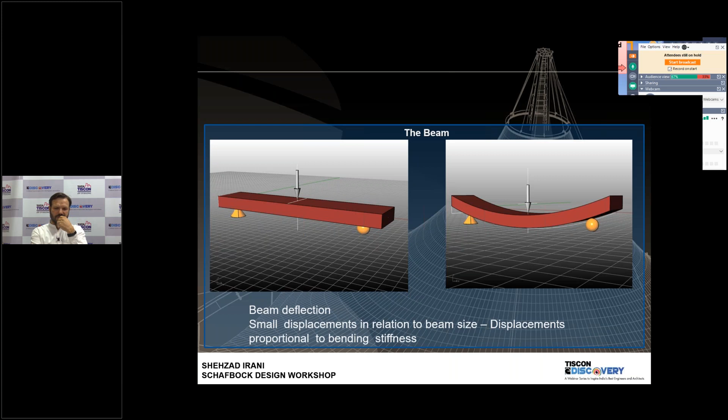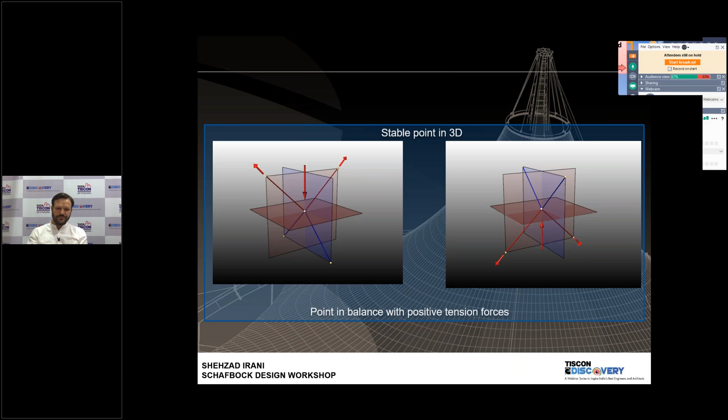But there is a whole new different type of structural system which responds to stresses by large displacement, and these are what we call soft shells, and they change their geometry to fulfill the equilibrium equation. To stabilize such geometry, we would have two opposing curvatures in perpendicular planes so that they balance out the positive tension forces. So now, apart from flexural systems, we have surface structures which are developable systems, which are flat, having a Gaussian curvature of 0.

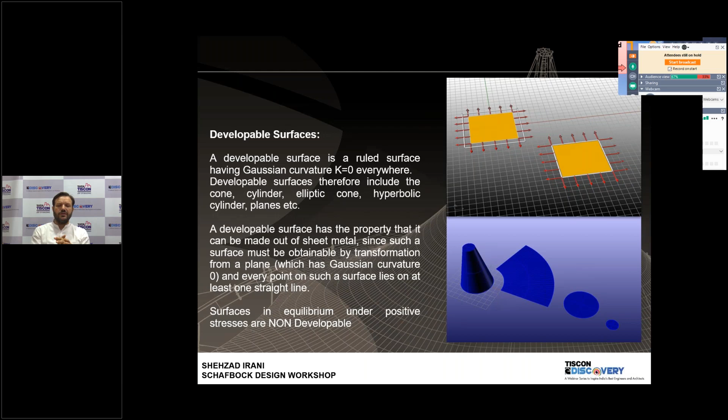When we say Gaussian curvature 0, they are developable surfaces. You could make them out of sheet metal, plain paper, or fabric. But there is also a whole different set of geometries which are non-developable surfaces, where the curvature is less than 0. These surfaces are what we call anti-clastic surfaces.

Anti means opposite, clastic means curvature, so they have opposing curvatures. If you see here, the blue line goes from high point to high point, and the red line goes from low point to low point, and both curvatures are opposite in direction. So basically these cannot be developed so easily, cannot be folded out easily without sufficient algorithms, because they are geodesics.

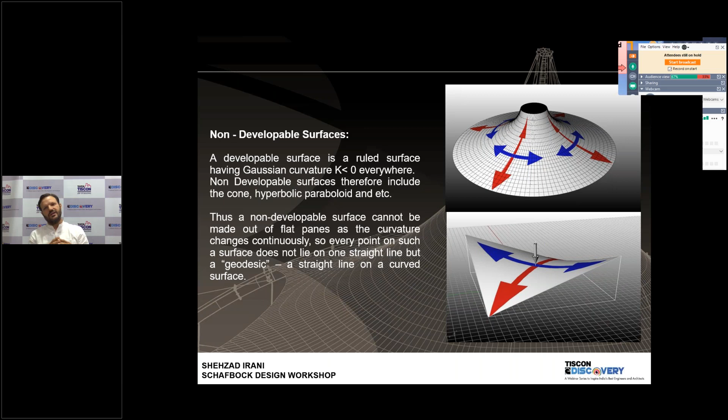Then the question really is, if you have curvature 0 and if you have less than 0, what surface do you have if the curvature is more than that? So we have what is classically called cushions, shells, paraboloids, where both curvatures go along the same direction along the surface, and these are inflated, cushion-kind of surfaces.

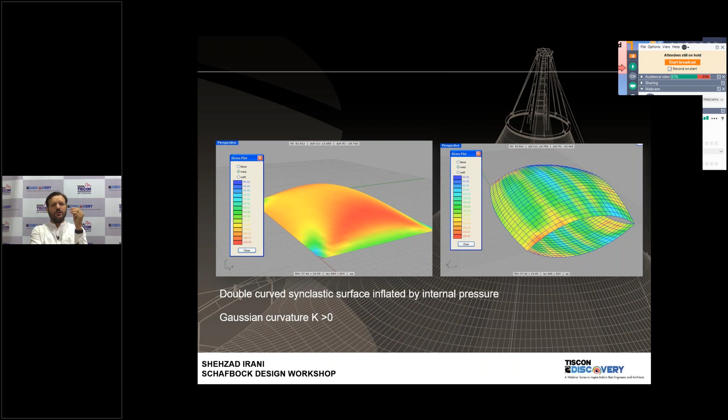So when we talk about design and analysis of tensile structures, when I talk about tensile structures, I purely mean high tension structures. I do not mean tents or canopies, because those are very low tension, low pre-stress kind of structures. They need to have a certain amount of negative Gaussian curvature.

When I'm talking about single layer curvatures, I'm not talking about cushions. They need to have a negative Gaussian curvature, so that the stress is along, and you have a uniformly stressed structure.

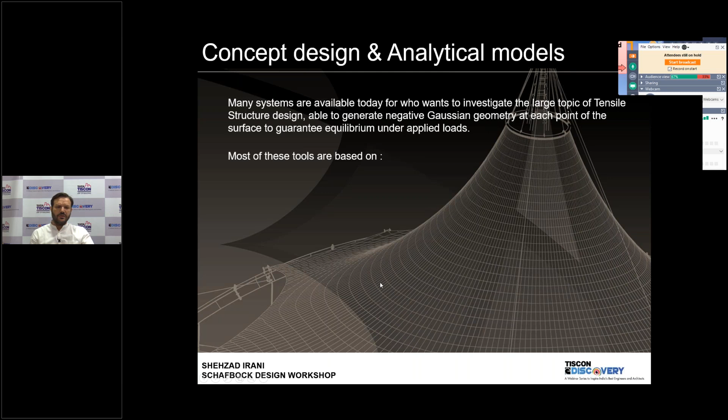Most of these tools are based on 3 or 4 different types of algorithms: force density method, dynamic relaxation, non-linear FEM methods, and natural force density method. These are

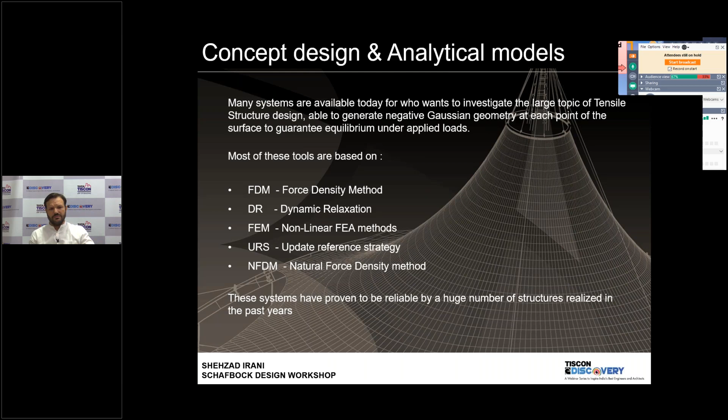all methods, algorithms, mathematical models to achieve our tensile structural systems. Let me just go through the systems to tell you about what those systems are about.

Force density method has been around since the 1970s. It was the math written to design and analyze the cable nets of the Munich Olympic Stadium. It's very fast and very easy to understand, quite robust, used worldwide, and able to solve a plethora of different types of geometry, mainly non-uniform distribution of stress.

But the disadvantage with these systems is that it's difficult to mix different mesh orientations, because you would require geometric alignment of the mesh, quadratic alignments of the mesh. Shear stiffness is neglected, so in most cases it's not so much of an issue.

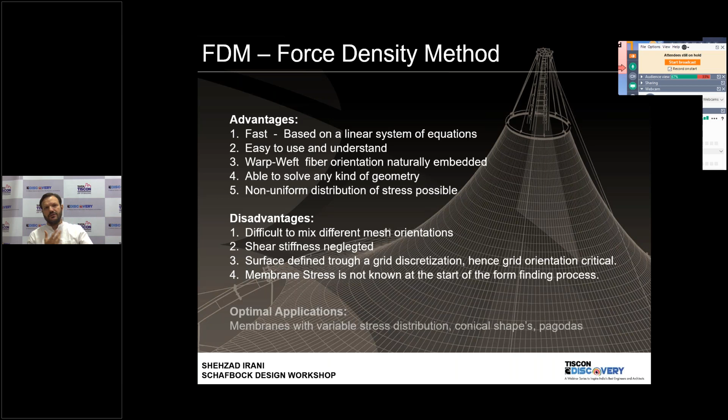But when you find extremely asymmetrical kinds of structures, like cones, there's a high amount of stress concentration on the end points and on the head ring, and shearing happening within the membrane. This is neglected and cannot be plotted using the force density method, so it's difficult to use these kinds of systems for such applications.

It's very apt for using in systems where there is variable stress distribution, like conical shapes, like pagodas, and so on and so forth.

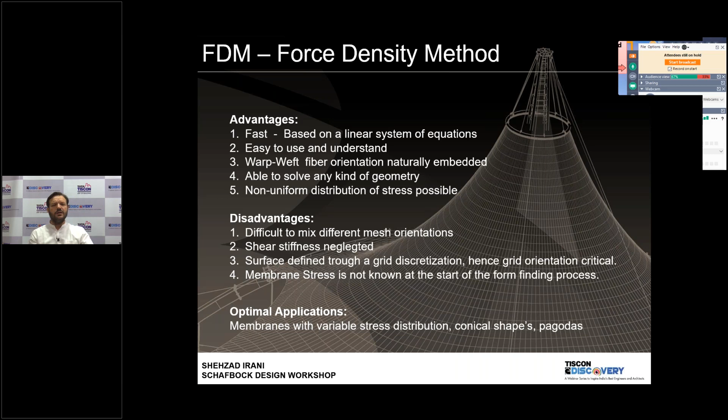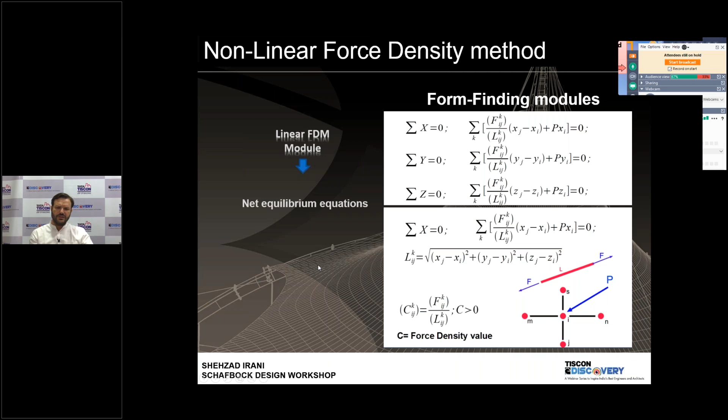When we talk about nonlinear force density methods, this is the algorithm for finding out force in a linear way - I won't go into the math right now. Basically it is more linear oriented. If you see this curvature here, but over this axis there's very little curvature, hence force density method would be the right algorithm to use for this kind of form.

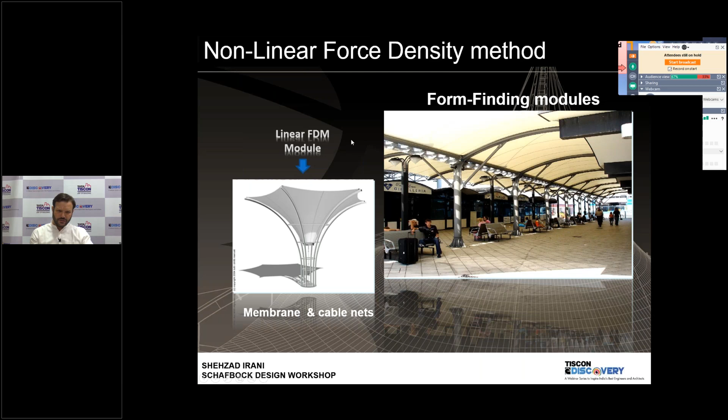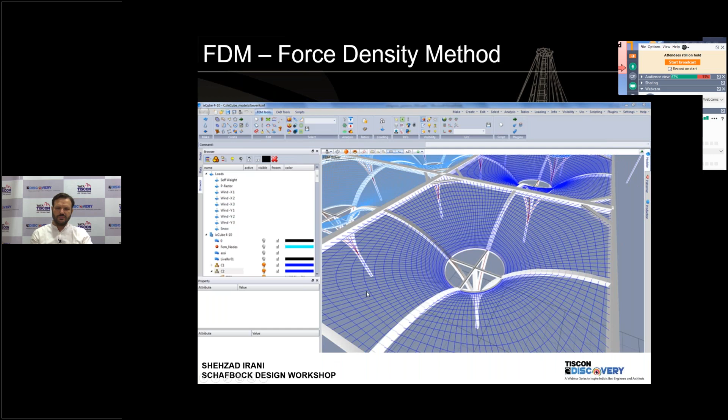So you have the grid over here with stresses on them as elements, and each of them has stresses. These are the kind of structures you would design using force density method, because you would see the warp and the weft having different elements of stresses.

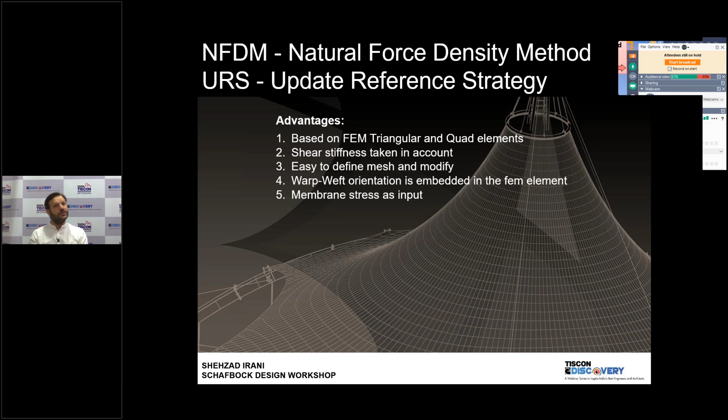When we talk about nonlinear natural force density methods, URS and NFDM are good approaches, because you work with triangular meshes, and you work directly on the meshes. So you work with surfaces and not only a grid or quadratic setup, and you are able to do a lot of continuum surfaces using NFDM.

But in this method, the warp and weft orientation has to be assigned, because without assigning it you will not be able to track the shear stiffness. And that brings me to the weaknesses of these systems: they are very difficult to use to find and define non-uniform stress input.

If you're talking about continuous cones and rectangular cones rather than squarish cones, it's very difficult to find the form using NFDM. Similarly, because we need to get the shear stiffness, we also need the Poisson values, and these are not usually available or calculated by the fabricator, and they vary a lot depending on the pre-stress and for each load case. So it becomes way more complicated than FDM to analyze.

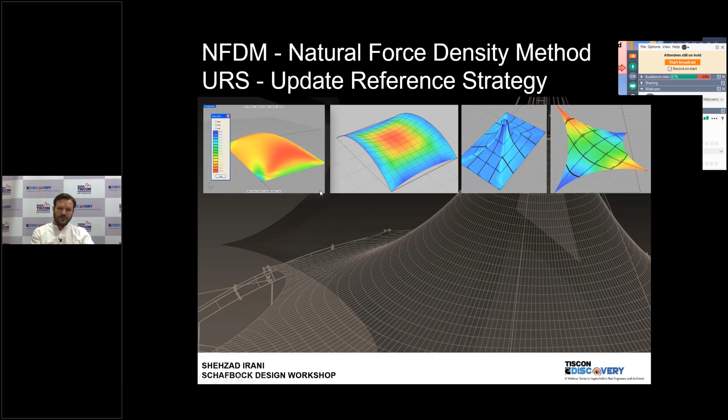These methods are usually suited for cushions, minimal surfaces, and membranes with uniform distribution of stress. NFDM was developed by Ruy Pauletti, and URS was developed by Kai-Uwe Bletzinger. As I said, these are the kinds of forms that should result.

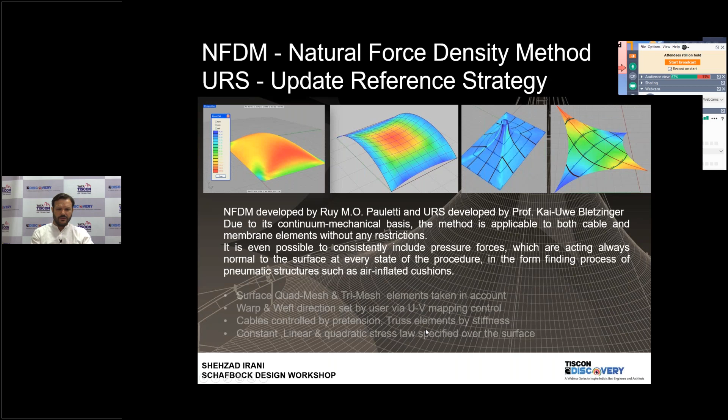When we talk about another method, called the direct stiffness method, which is based on FEM triangular and quad elements, shear stiffness is again taken into account. It's a much more technical form-finding method, because you are inputting the membrane pre-stress as an input, so it's actually like saying we are pulling a certain membrane with certain pre-stress, and seeing what form results.

So we are directly inputting the stress and directly getting the form according to that. The advantage is that it's very good for structures like tents, tarps, and inflated structures. But when we're dealing with very complex forms, it's extremely difficult to converge these kinds of matrices. And again, the Poisson's ratio needs to be as accurate as possible, which is usually not available.

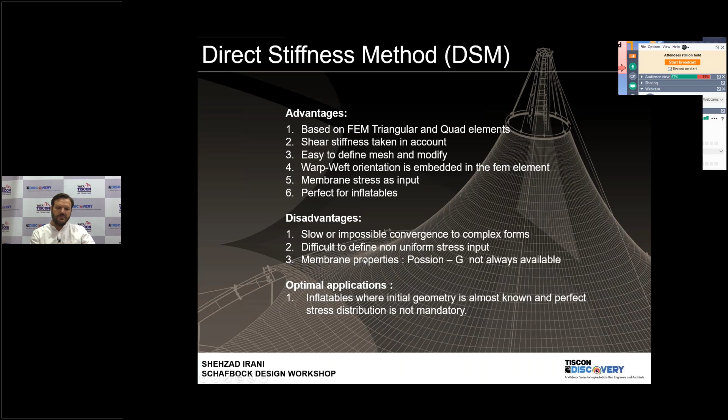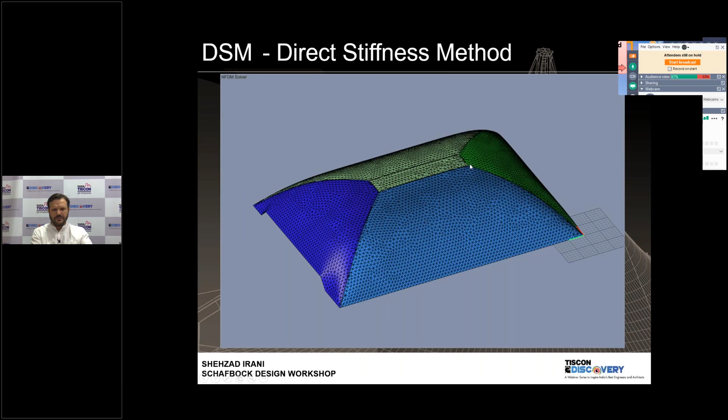Now a wide application is inflatables, where we already know roughly the form that we want, and we just want to get the overall pre-stress and stress distribution over the surface. So to give you an example of a similar kind of thing, this is roughly the tent we are looking at. It's an inflatable with cable at four corners, and you can see that it's not a uniformly distributed stress over the membrane.

But we are okay with this, because as builders we tend to reinforce this with a double layer or triple layer, and we'll be able to get out these stresses. But overall we have the actual pre-stress that we are looking for in such a structure.

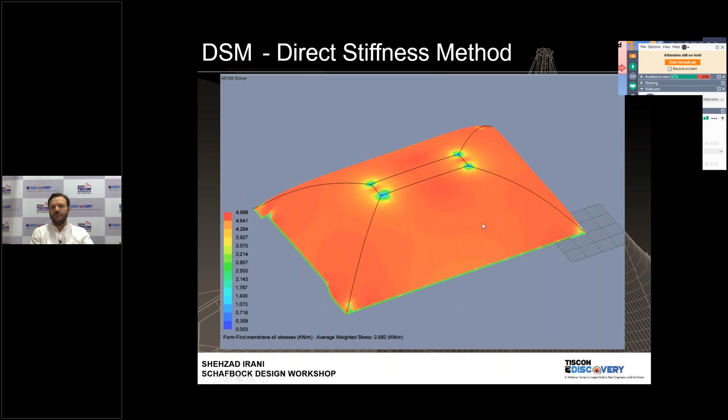So just to give you an example for this one, I'll just get the answers. We would tend to do FDM for this kind of structure, because the grid is quite quadratic, and we've got a variation of stress completely over the membrane. We would do an NFDM or a URS to get as close as a soap bubble film for these kinds of structures.

This would be an NFDM because we want as much of a uniformly stressed surface as possible. And this, obviously, when we are taking a stiff piece of, let's say, a 2 mm sheet of aluminium, and assigning certain forces, and we want to see how that piece is going to deform, we are going to use the direct stiffness method.

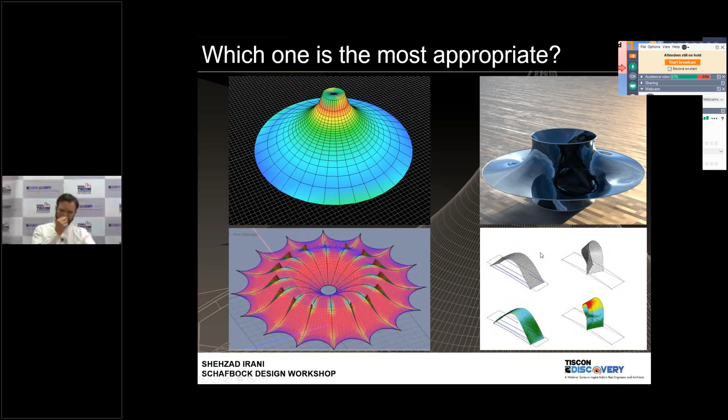So what usually happens is that if you have a linear FDM or a non-linear FDM module, or a URS module, you will first find the form and get the pre-stressed membrane or cable system. Then you would put in your supporting structures, which will plug into your non-linear FEM module, the finite element method module, and get your final model ready for other processes and so on.

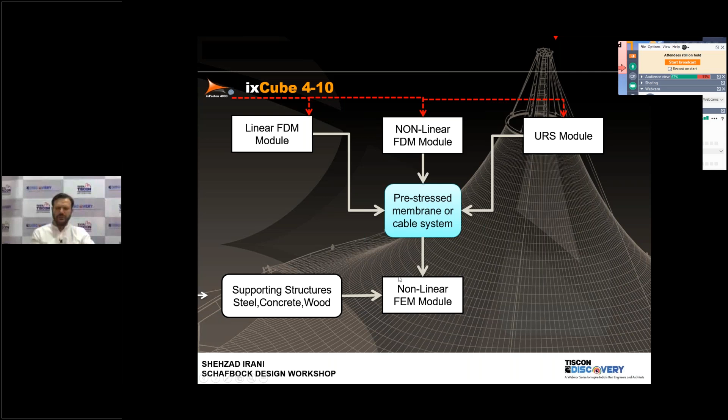So this is roughly the path that you would follow. The reason I would separate the form finding module out is that there's a tendency, if you're not very experienced or don't know your final target pre-stress or target form, to go into a loop between the form finding and the pre-stress a lot before you achieve your final form. And if you do it with the supporting structure, it will tend to be a very long process.

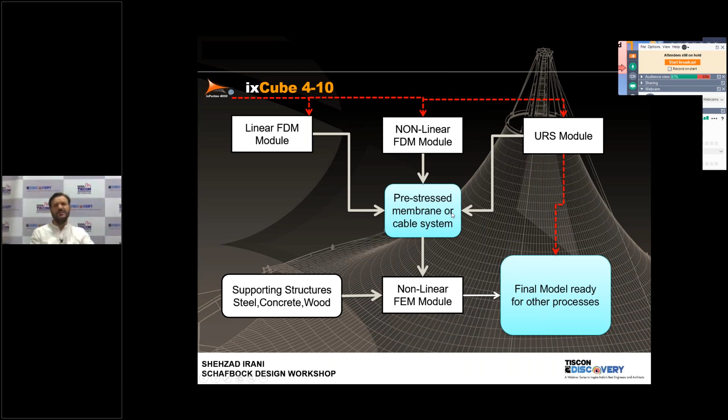So the real idea would be that you finish your loop here, then you come in and do your analysis module, and get the final model ready for other processes. But tensile structures, as we know, are not only for membranes.

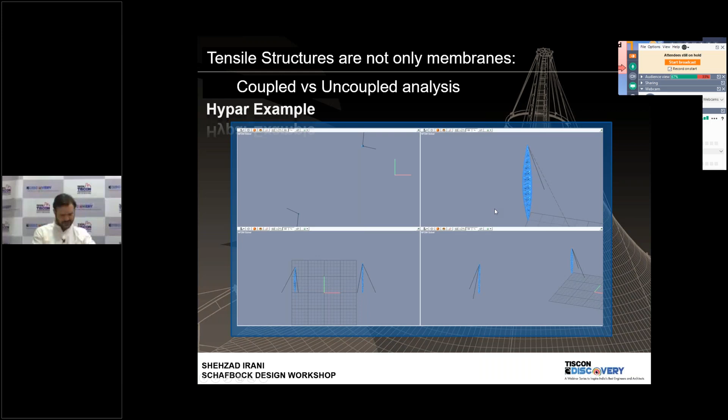So what happens is that usually people will work with coupled or uncoupled analysis. They will do the form finding, get the stresses in the warp and the weft, and then put the structure into another software and get the forces there to design the steel. Now I'm just giving you a very quick example of this.

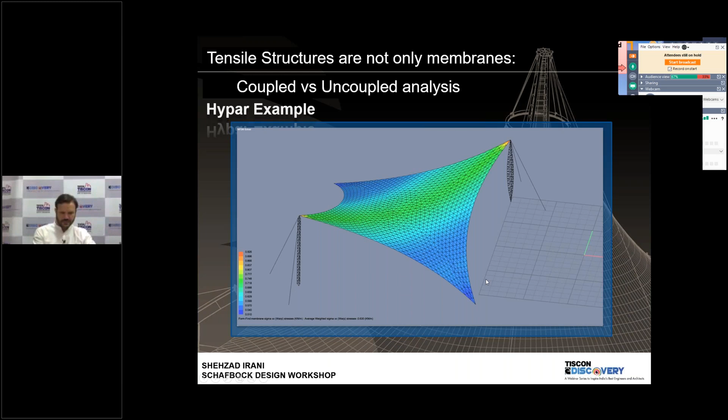That was the uncoupled part, but this is the coupled part, where the structure and the membrane are in the same software itself. So here you see the coupled analysis where there's a certain amount of deformation, around 140 mm. And again, if you see the node displacement, it's 145 mm or so. Now over here, the beam will tend to rotate and come in.

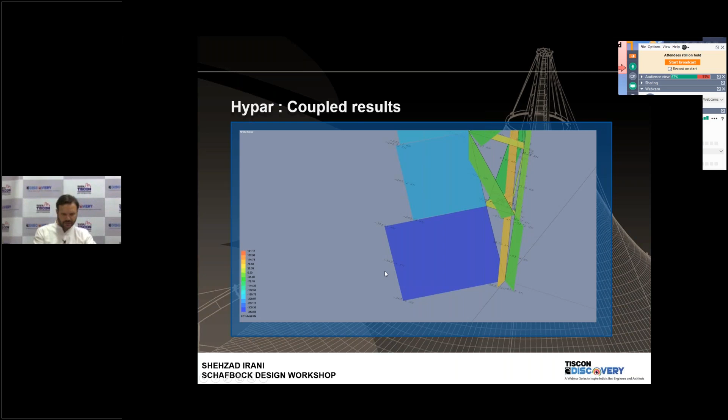And then you have, because it is coupled, you would have the stresses in these cables, which is around 191 kilonewton, and at the beam bottom, which is around 343 kilonewton.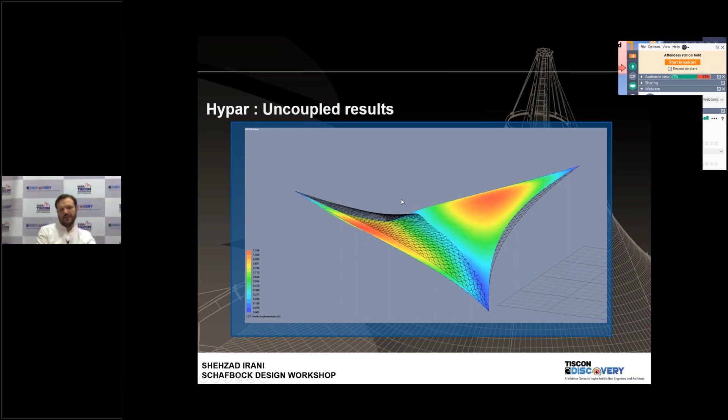Now let's do an uncoupled analysis. When we do the uncoupled analysis, obviously these nodes are fixed, so the deformation displacements are much lesser, because it's not rotating and coming in, and it's not losing pre-stress. But when we take these forces and apply them into this system, we will get our forces in our cables and in the steel elements. And here you see now the load is around 537.

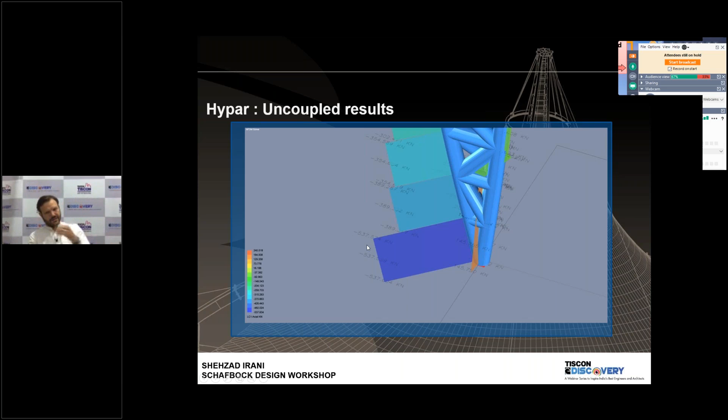So what does it mean? It means that when we do a coupled analysis, the deformation for an uncoupled case reduces by almost 23% in this case. But when we talk about the forces, they increase by 30%, and the actual force on the beam, the reaction beam axial force, increases by 56%. Similarly, the reaction at the foundations increases by almost 30%.

This means that when we design in an uncoupled way for a pure tensile system, we will tend to design our foundations at least 30% heavier. Similarly, the steel structure supporting our tensile structure would need to be much more, around 56 to 60% more than what is actually happening in the structure. So it is very important that we design it in a coupled fashion rather than in an uncoupled way.

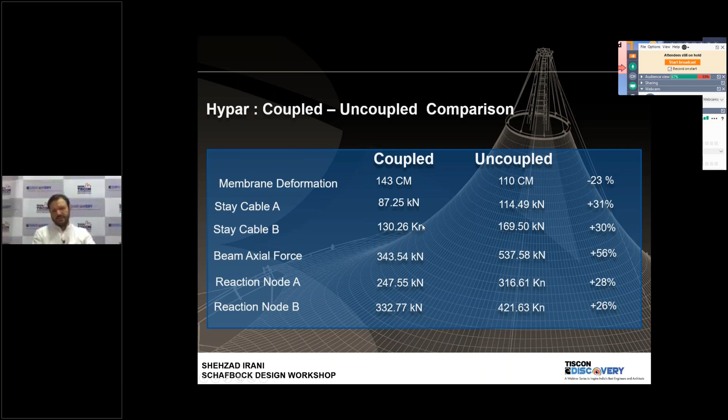So how do we go about doing this? Basically we have what is called conceptual design, where a sketch from an architect or a designer goes in. We have the form finding, the structural analysis, the structural design, the patterning, connection details, and installation. The design process usually starts with the architect making a sketch.

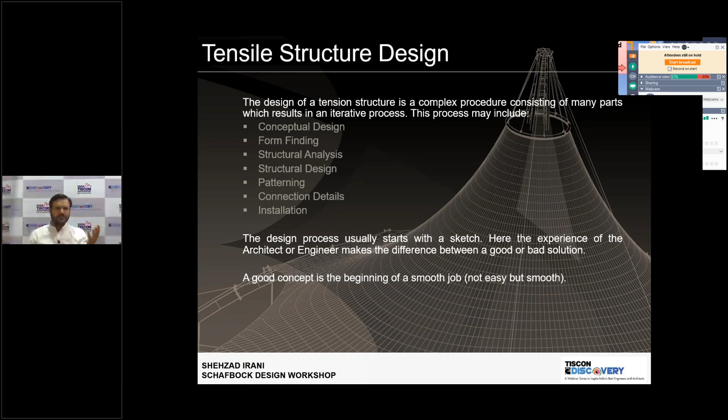The experience of the architect or the engineer usually makes the difference between a good and a bad solution. A good concept at the beginning results in a smooth job because you converge your design faster, you don't have much changes. But a bad one becomes a nightmare and is generally very expensive to build, or it might not even be buildable because they do not follow the stresses.

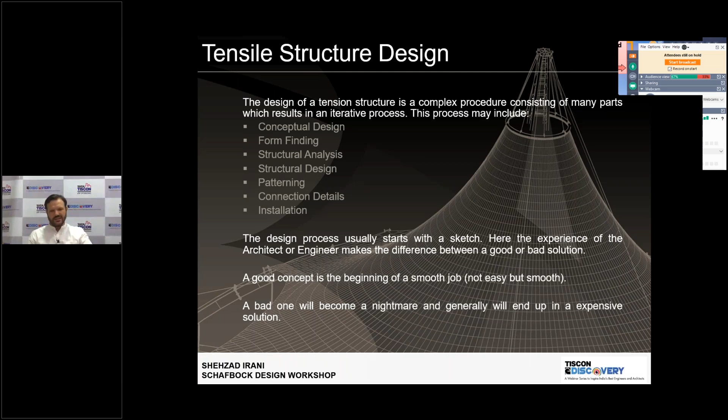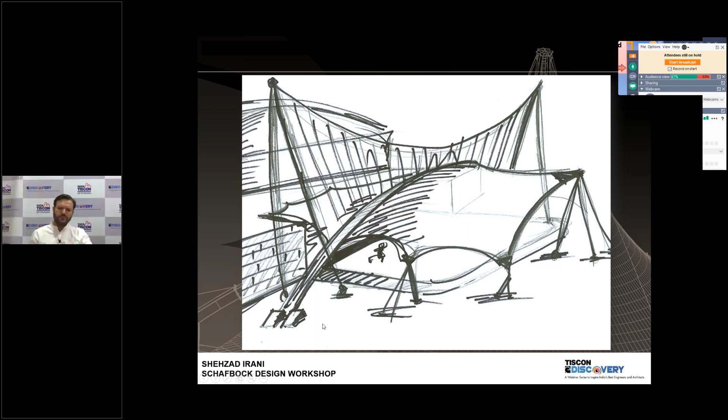You do primary 3D modeling for them, certain day views, certain night views, so that the client can get a real feel about what he's expecting out of the structure. And the deal is done. This is the price. You go ahead and you start constructing the thing.

Now, because it was built with such a lot of clarity, you can do this much amount of detailing, or you are clear about how the tensile system is going to work out, and it works out pretty well, because this is what the original sketch looked like.

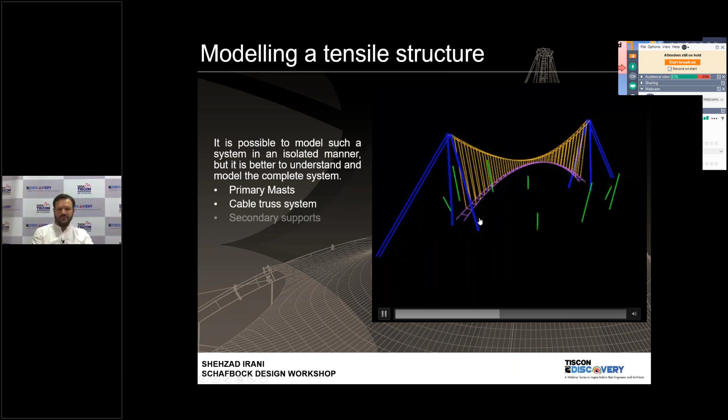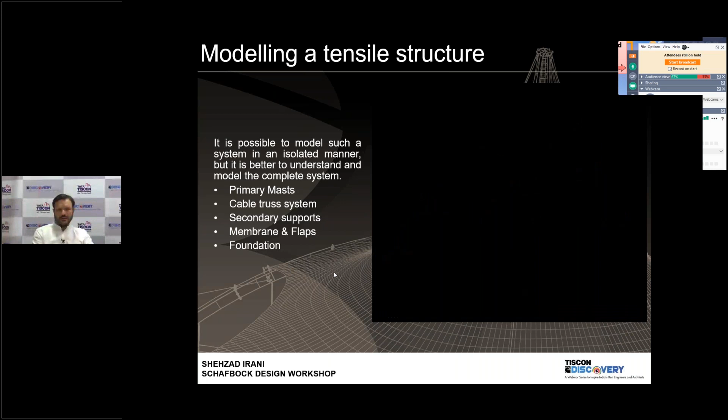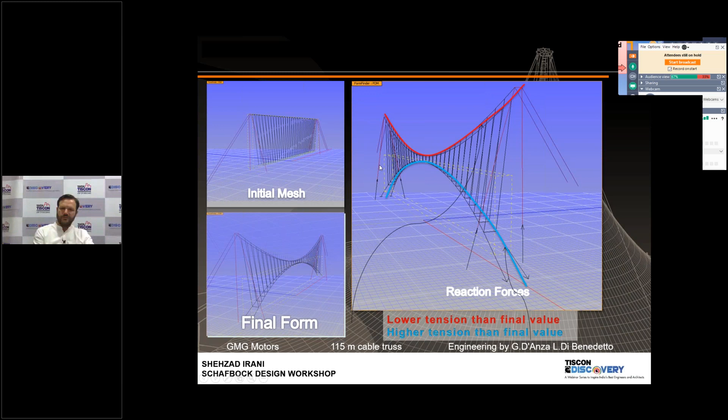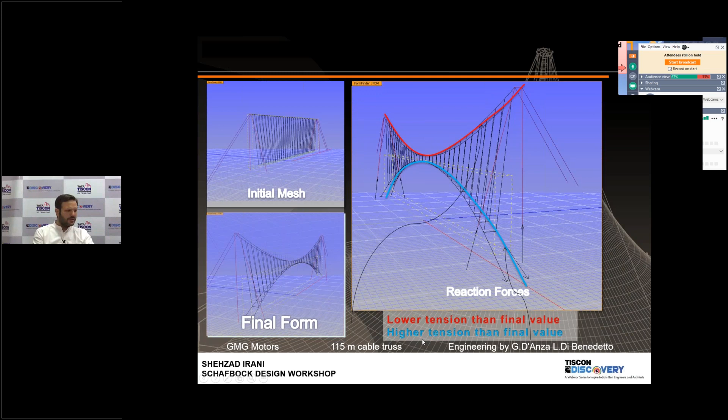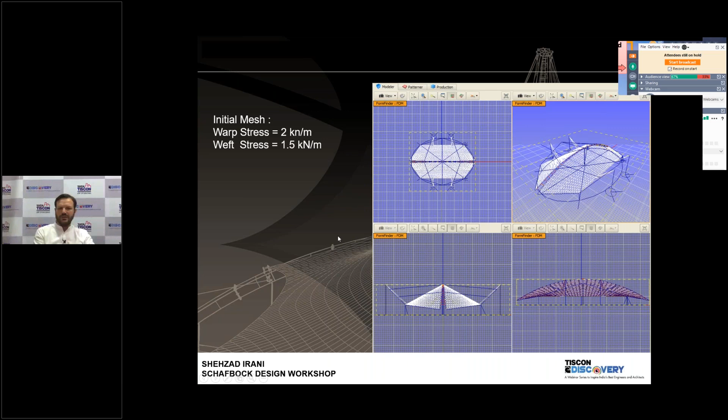Basically what happens is that the upper cable will have lower tension, and the lower cable will have more tension, and that's why it will pull out and make this kind of form. After that, we have done our initial form finding with our nodes fixed to get the form, and then we'll incorporate it into our final structural system to understand the direction of the principal stresses and the supporting stresses.

And then we merge the model. So the ideal way is, as I explained, that you first do your form finding separately, you converge on the shape, the height, the ponding, the wind forces, have a rough idea of what changes in the form are required, and then involve the non-linearity of your structural system.

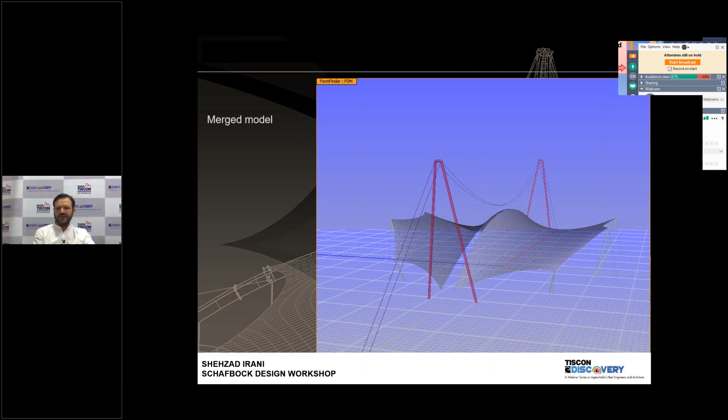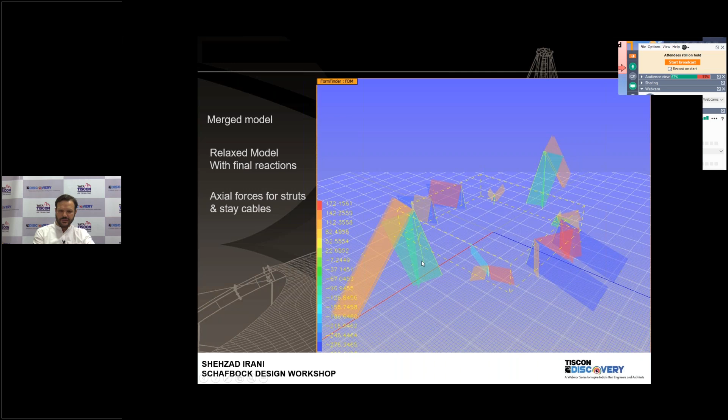So this is the final structural system relaxed with final reaction forces, for which you shall be designing the foundations. And everything, if you see, they are in axial forces. There are no internal bending moments that will be there, but the whole structure is in axial compression or tension. So now the model is ready for detailing patterns and analysis.

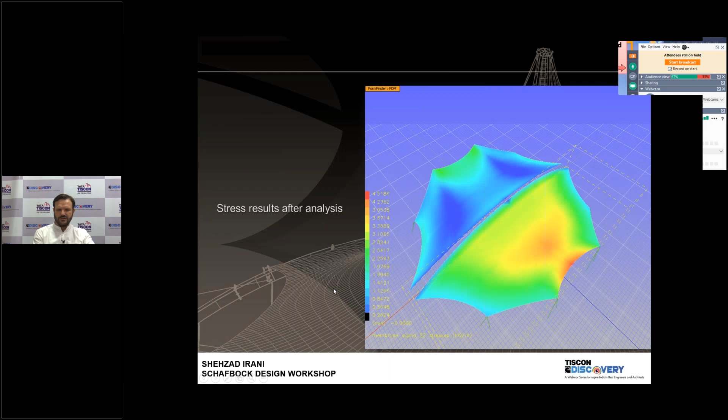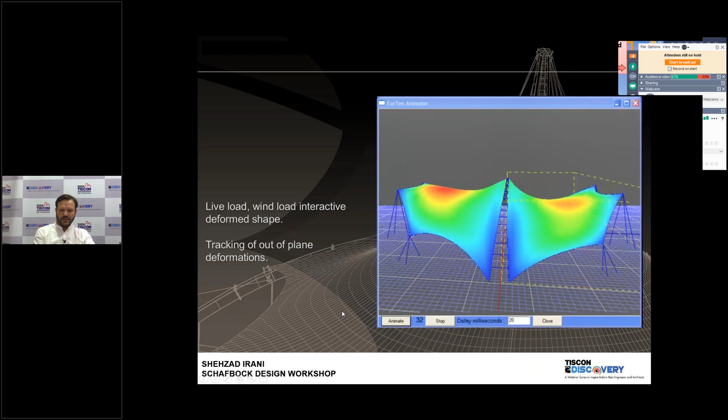So I'll take you through a couple of case studies about how we go about designing the structures so that you can understand them better.

This was a project that was done in Barquisimeto, and the clients were a very big builders, Sambil in Bogota and Venezuela. And basically the roof is shaped like a cuatro. Cuatro is a four-string musical instrument, and that was the main idea.

The total foundation area is 180,000 meters square, and it has over 2,500 parking spaces with 260 commercial premises, and so on and so forth. The roof itself is around 4,500 meters square.

Again, being South America, which shares similar kind of cost issues like our country, at the same time it required a very European kind of finish design. The type of membrane that they wanted to use was pretty low grade.

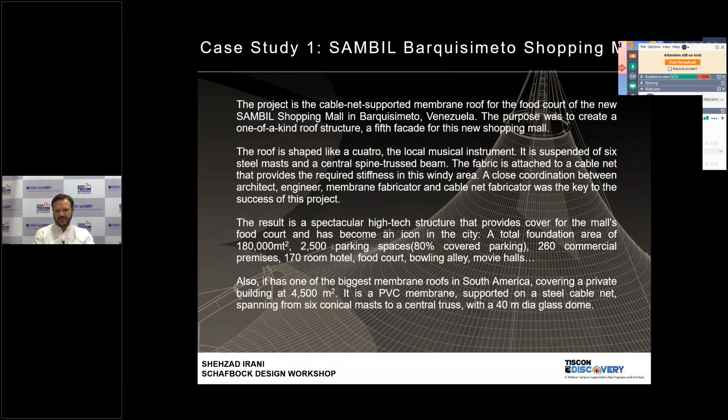So basically, this is the whole structure, and this is the roof, this is the glass dome, and this is the main span of the structure.

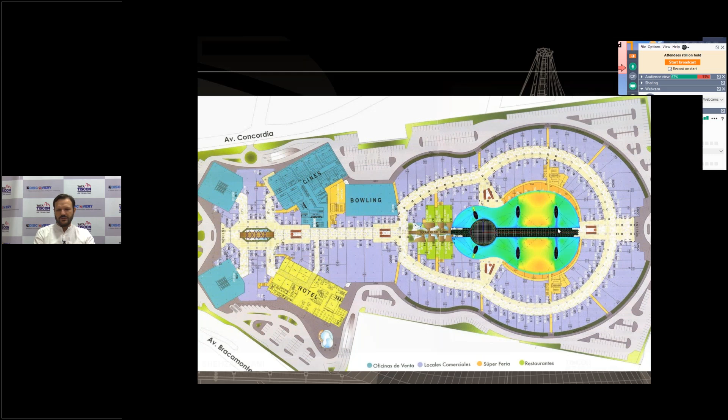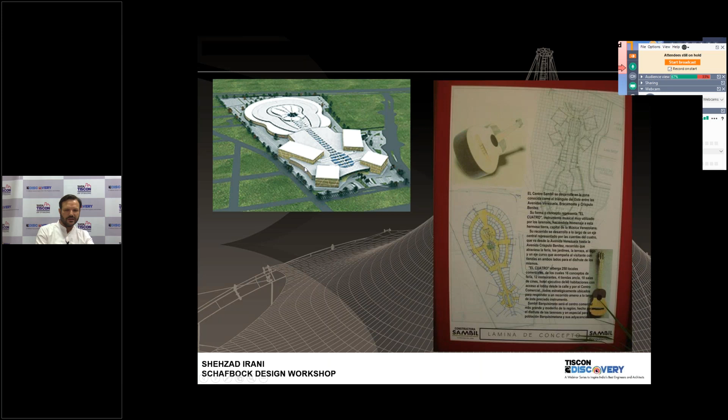So this is the cuatro, as I was talking to you about, which is a four-string instrument, and this is the initial concept of the client. So you see it's very flat, and 4,500 meters square you will not be able to achieve with this kind of flatness, because there would be serious issues of water ponding and so on and so forth.

Fortunately, we had the architect on our side, and this is what the final structure looks like. So how do we go about designing it?

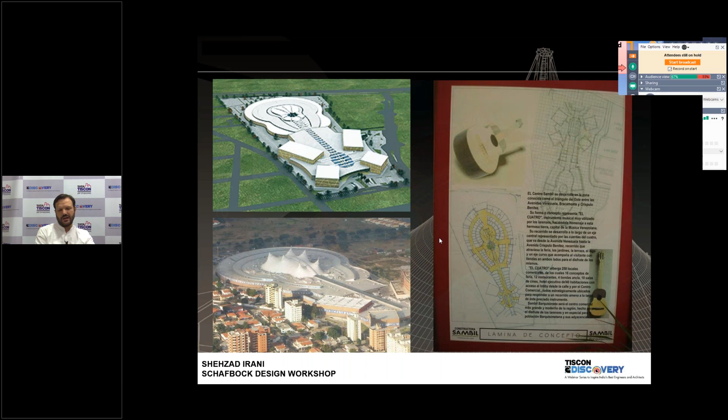So this is the integrated model of the steel and the cable net. You see the cable net below in the blue lines, and the fabric as the black lines.

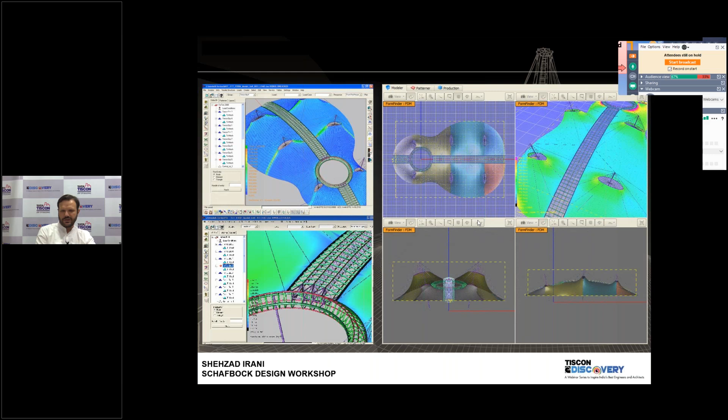And this is what is happening on site. So basically, you see the people working there with this whole steel truss which is suspended from this cable net, and this is what it looks like spectacularly from below.

And the membrane is supported over the cable net, hence we could go with a lower grade of membrane in this case.

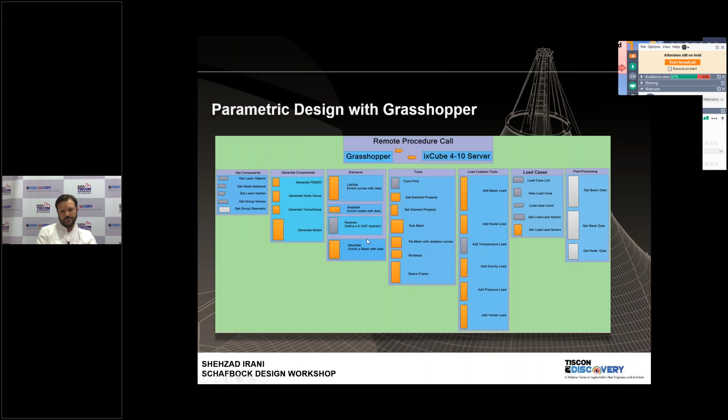To give you a brief about parametric design with Grasshopper, many times because of this looping, we have got now recorded history kind of systems where we can keep on changing the parameters that go into our designs, which dictate our design, and create models and very quickly change the parameters again and come back. Those people who use Grasshopper or Dynamo would understand what I'm talking about.

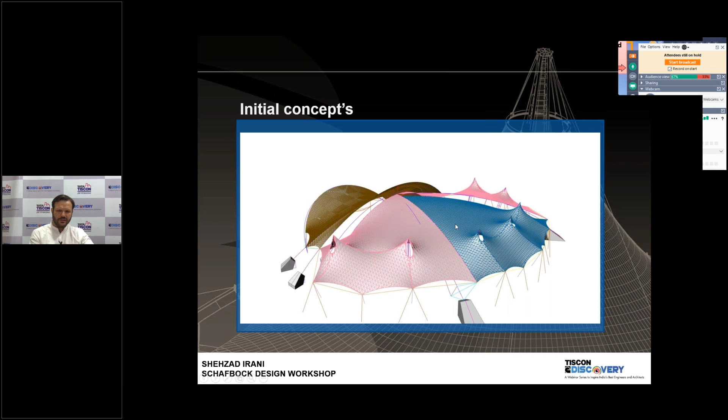And this was the initial concept. Now, obviously, it has a lot of flat area again, which would never work. And there were certain initial concepts with cable trusses and beams, and then this was roughly what was accepted as the final concept, buildable concept.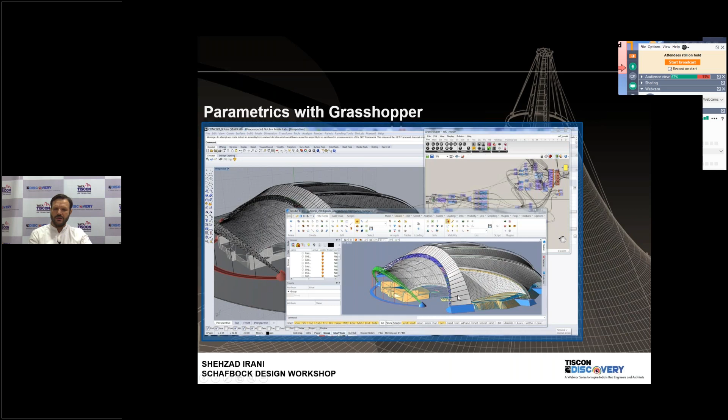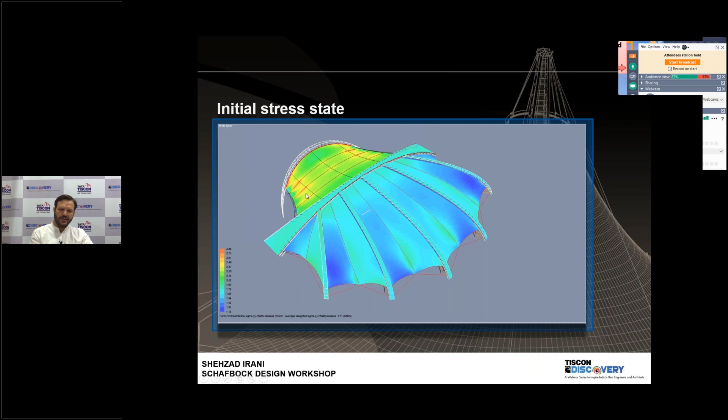So basically, Grasshopper and Rhino allow a lot of back and forth that you can do in the design, in terms of shadow studies, in terms of the analysis of beam sizes, and so on. Here is the model. This is the initial stress, which is relatively uniform overall in this area, and this is the warp stress or weft stress in the second direction, because you have a cable net over here.

As I was talking about parametric design, many times it happens that initially we have a concept, and then we push it through wind interaction or a CFD model, computational fluid dynamic model, and we result in a huge amount of stresses at stress concentrations, and then we have to go back or over-design our elements to take the stresses. In this particular case, it was very fluid because we could take it into the CFD model and take the stresses out, getting different directions.

So here you see a lot of stress buildup, with CP values as high as 0.9 and negative values going up as -2, which obviously is not possible when we talk about codes, because even most international codes, British codes and European codes, do not have sufficient wind tunnel data to support these kinds of structural systems. It's very difficult to make out these CP values without doing a wind tunnel test.

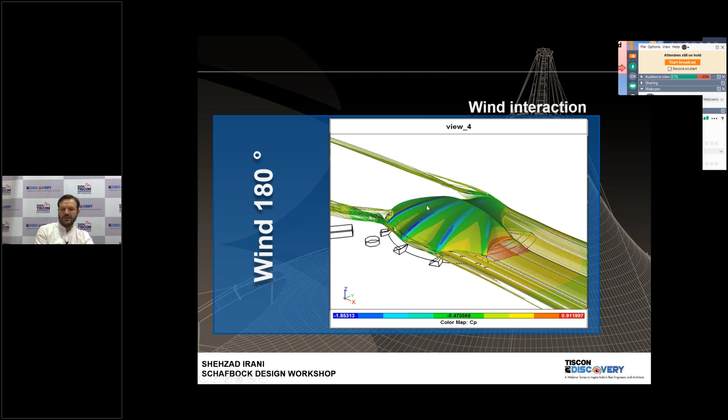The usual approach is to do a uniform wind pressure or wind suction, but that's just handling the static behavior of wind, which is a very small aspect of it. A much greater aspect of wind is in the nonlinear, non-static kind of response.

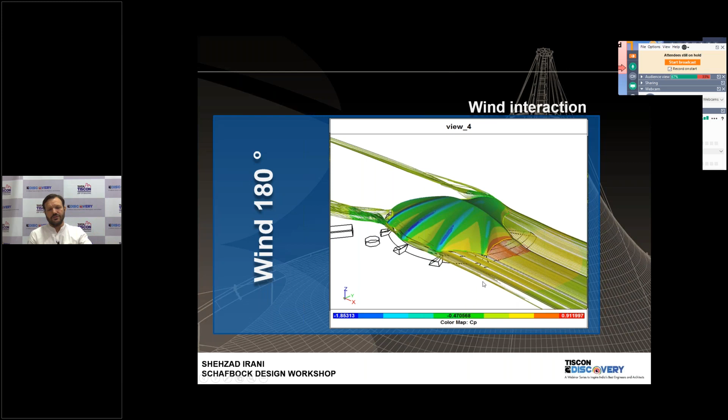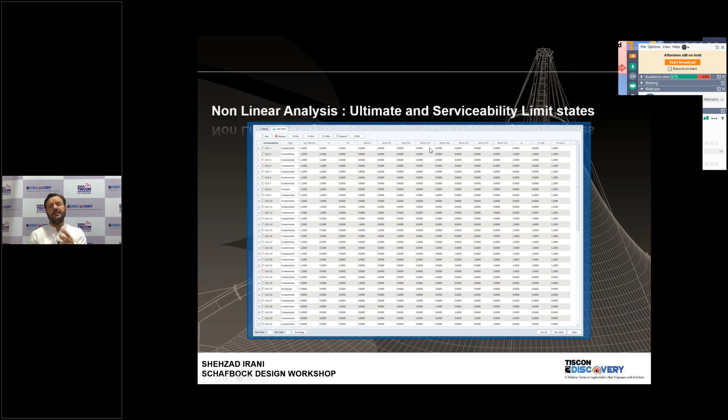So here we have the wind pressure loads, the CP values, as I explained, from the CFD, again in a 180 degree direction. Based on that, you can design or redesign these structural systems, and you can tend to result in 31 different load cases. But using parametric design, you can still keep on changing your initial concept and parameters, developing a better and better structural system.

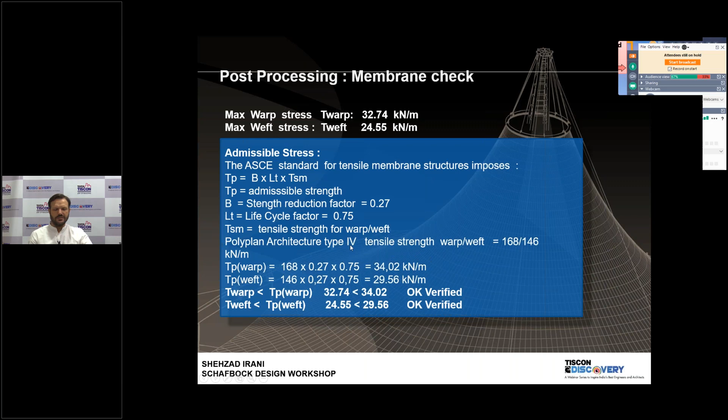Here again, a little explanation on the membrane stresses. This is a type IV membrane, I think. Warp versus weft is 32 kilonewton and 24, and the factors of safety are roughly higher than expected, hence we are able to get this.

This is showing the steel process post-processor in the software itself, and this is showing the profile list. So that was the factors of safety, and as expected, now none of them are going over. They are about 0.4, and this is blue, which is greater than 1.64.

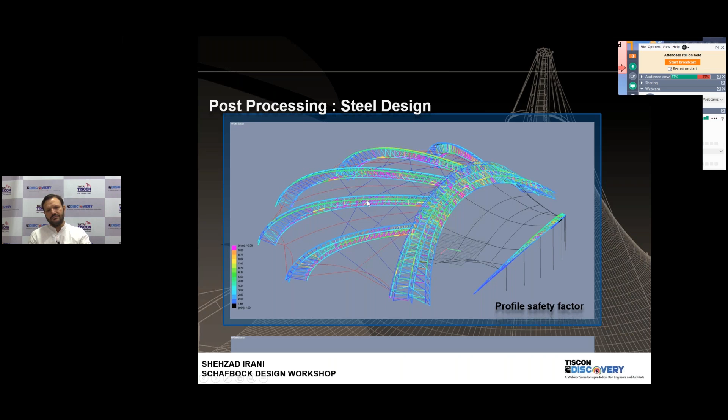As expected, they would have the maximum bending moments here, and then these are the member sizes.

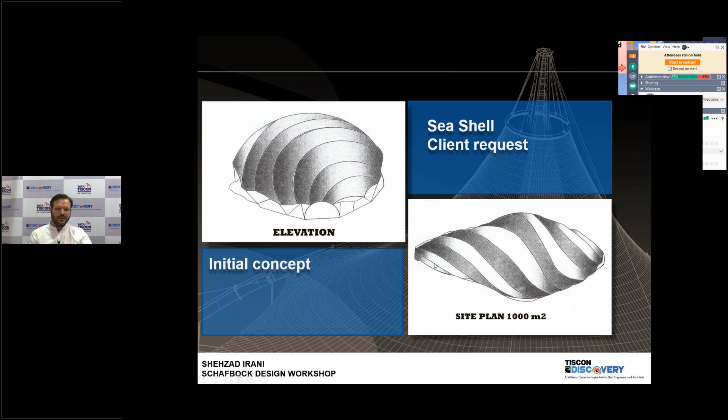Another project, about 1,000 square meters. The initial concepts were very rudimentary. This is what the site was given to us, and this is the kind of detail that comes.

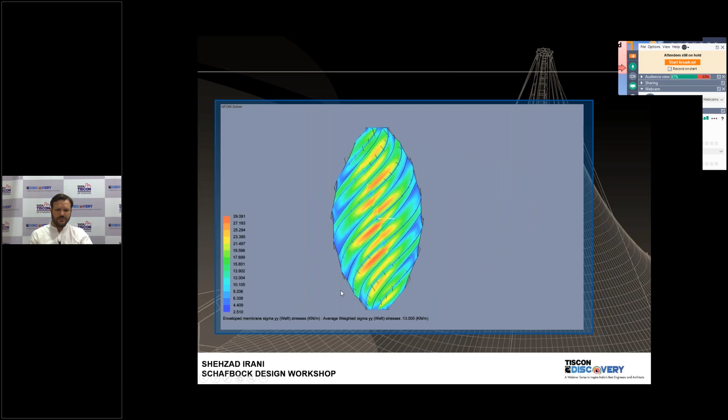So we designed a complete roof system where you had this initial warp and weft and the displacements. This is the envelope shear results, and this is the envelope moments.

So it was designed as a space frame instead of a membrane system, thought of because the client was extremely short on time. At that time, the design period was just 15 days, and they expected wonders, but it's still not built as yet. So this is what happens.

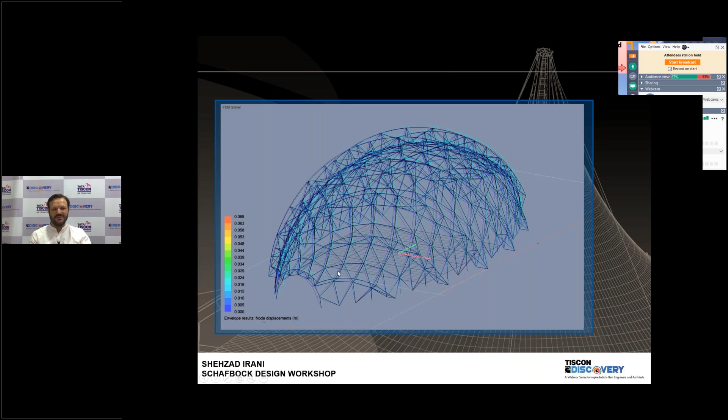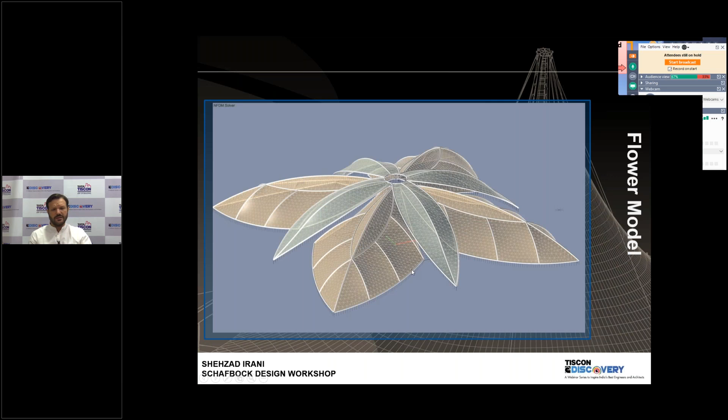Anyways, another concept, another similar location, 60 meters by 60 meters. This is what was expected, no supports at center, again similar kind of details, and this is the final structure. As compared to the original concept, we were able to pull down the steel considerably in this particular case, when you see the warp and weft stresses.

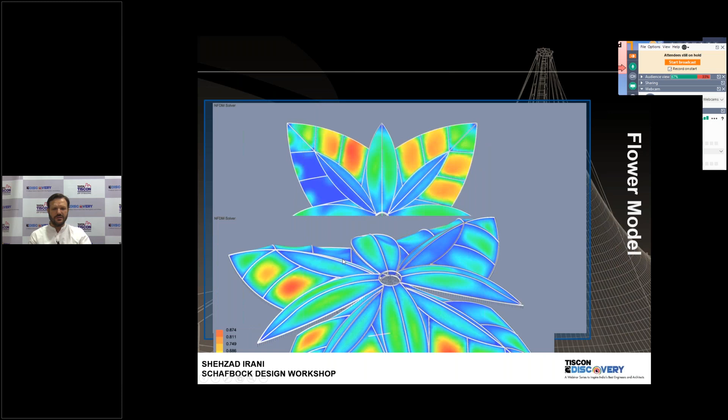Initially there were trusses all over, and here you just have the trusses on these main elements, which are themselves three-dimensional truss systems.

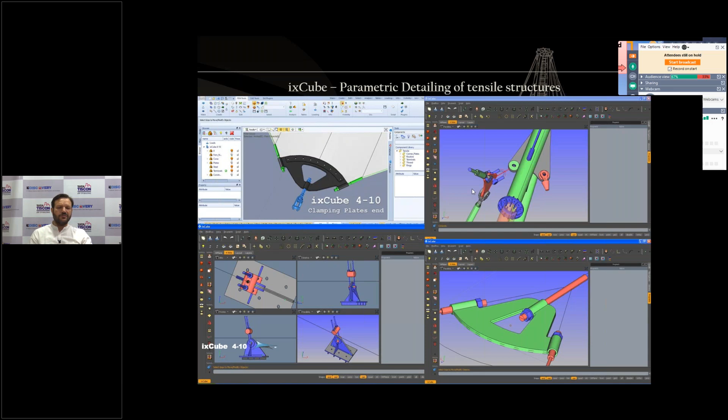It does not end there. Basically, now we are looking at developing parametric end plate detailing and steel structure detailing of the whole structures, be it for head rings or end plates, which would all be dependent on the project.